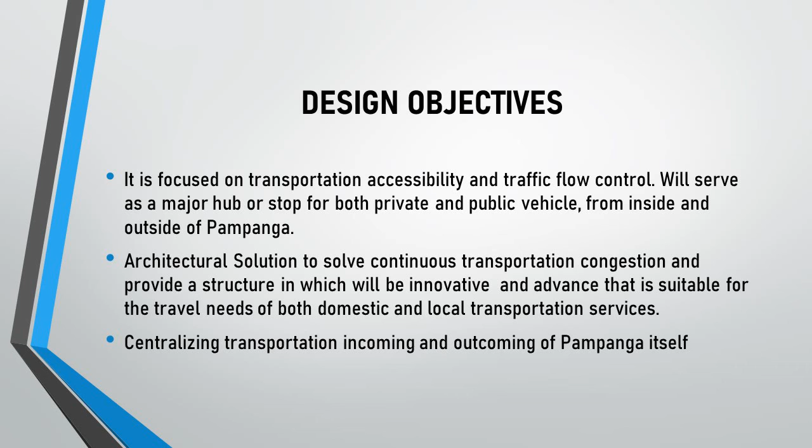Lastly, to enhance economic development, the transportation hub should be used to spur economic development, particularly in the downtown areas, meaning it will be aesthetically pleasing so that it can help spur economic development.

The site location of the project will be near the Clark Freeport Zone, along the north of Barangay Poblacion and Barangay Mapiga. It has a lot area of 75,163.56 square meters, which is around 7.5 hectares.

The site access of the road network for the project will be along Gil Puyat Avenue, along Clark East Perimeter Road, and lastly, near St. Ines Interchange. The surrounding developments for the site is adjacent to the North Luzon Expressway and near the Clark Freeport Zone, which is near the developing Dinosaur Island and the current expanding of the Clark Freeport Zone.

The composition of target for the project will be the international, national, and local travelers. With the current increasing tourism of the said city of Pampanga, the expected increase in people visiting the region will not only improve the economy of the area, but it will also affect the current stature of tourism in the Philippines, as the government may be able to build funds making full utilization of the land transportation, which is fully functional 24/7. It will also greatly increase access to other parts of the region who reside in the isolated areas of Mabalacat, further north.

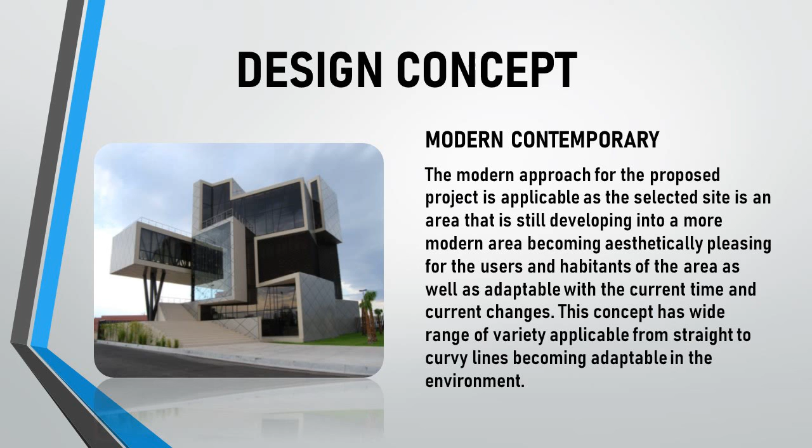Next will be the design concept. The architectural style used on the current project will be modern contemporary. This is the modern approach for the proposed project so that it be applicable to the selected site, in an area that is still developing into a more modern area, becoming aesthetically pleasing for the users and inhabitants of the area, as well as adaptable to the current time. This concept has a wide range of variety applicable, from straight to curvy lines, becoming adaptable to the environment.

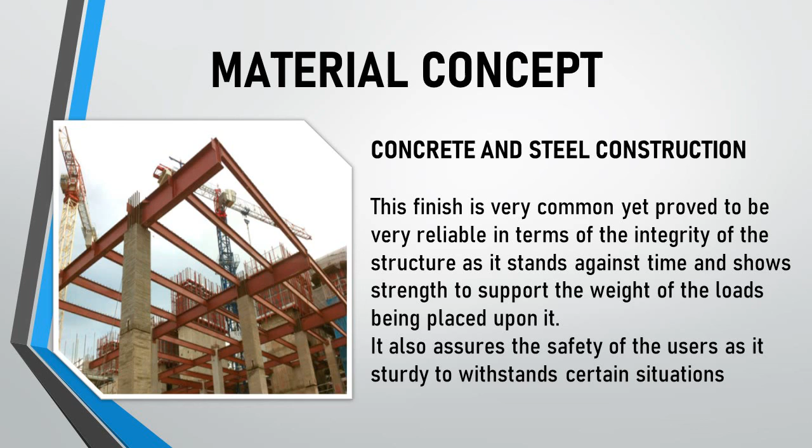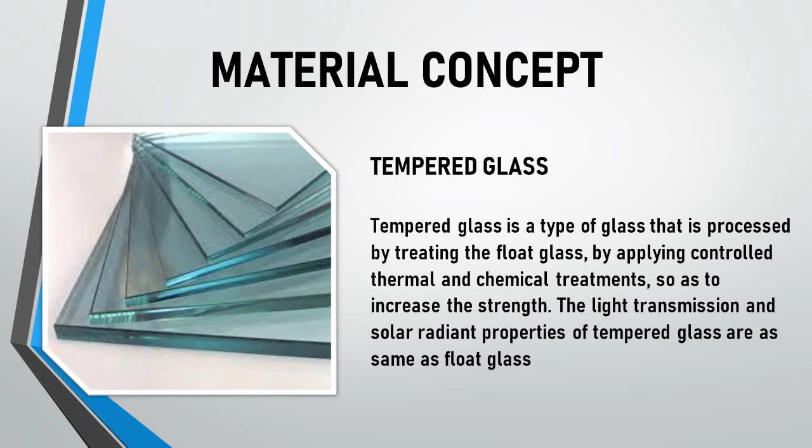The material concept for this one is going to be concrete and steel construction, as it's very common yet proven to be reliable in terms of structural integrity, standing against time and showing strength to support the weight of loads placed upon it. Another material will be tempered glass. It is the most economical and widely used material, which provides both strength and functionality, used in windows for the large scale structures.

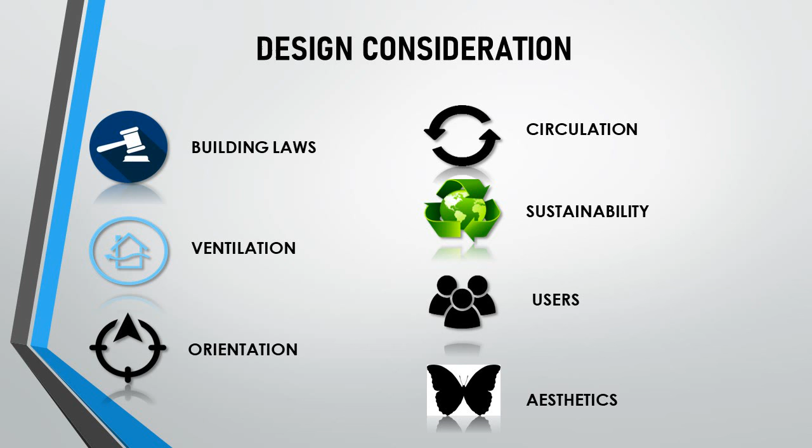The design considerations used on this structure will be circulation, ventilation, aesthetics, building laws, the users, sustainability, and functionality. The design philosophy under the project is: 'architecture should speak of its time and place but yearn for timelessness,' which is by Frank Gehry.

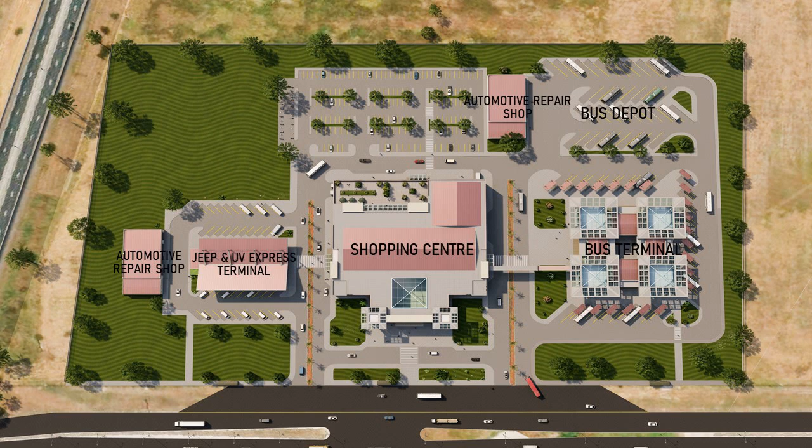The site is bordered with a vertical clearance of 4 meters cyclone wiring fence, composed with a road network going over the whole site with a proper circulation for both public and private vehicles, avoiding the current traffic in the facade of the project.

Roads consist of an 8-meter 2-lane road, for private and public vehicles as access for the whole site. There is a separate entrance for the buses, so they'll be able to circulate from the bus depot, for buses that are on standby.

There are 5 buildings in the current project. First is the shopping center, which will be the second major source of income, as it may be leased by the government to private businesses and will serve as an entertainment and necessity area as a stop between travels. Second is the modernized bus terminal, which is the main source of income, as it operates 24/7. Third is the Jeepney and UV Express Terminal, which provides local transportation throughout Mabalacat and Clark, and lastly, the Automotive Repair and Maintenance Shop for both public and private vehicles, providing services for all who operate automobiles.

The design feature used for this project will be the skylight and natural lighting. This design feature focuses on natural lighting to make use of the current location of the proposed structure, and provide sustainable and cost-effective maintenance in the following years for the structure.

There is an allotted area for future development plans, in which the government may provide optional services or put in a business with private companies that could benefit the proposed project, such as a hotel, which may also boost further tourism.

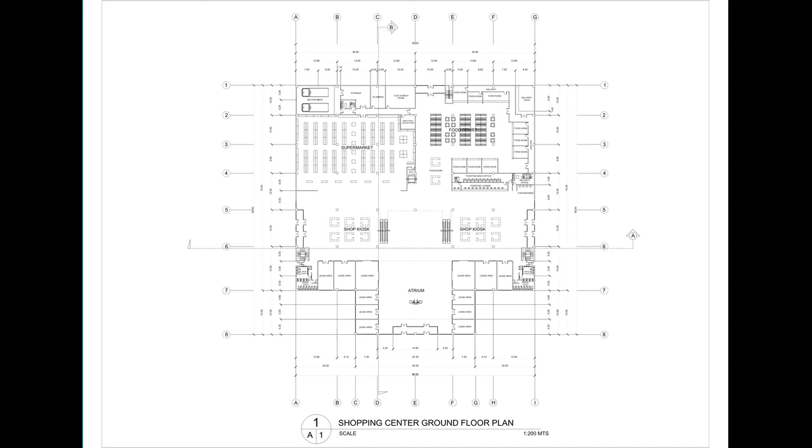Here are the current plans regarding the structures. First, the plans for the shopping center, as this is the necessity and entertainment area that will be providing services for the travelers. These are the plans for the bus terminal, which serves as the major mode of transportation for both domestic, national, and international travelers going in and out of Pampanga.

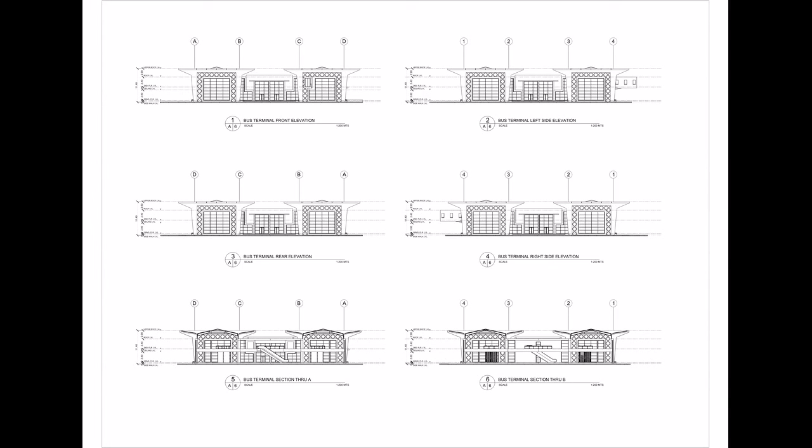Thank you for listening to my proposal, Centro, a multimodal transportation hub: a study on solving accessibility of domestic and national land transportation through modern architecture. Here is the walkthrough for the whole project.